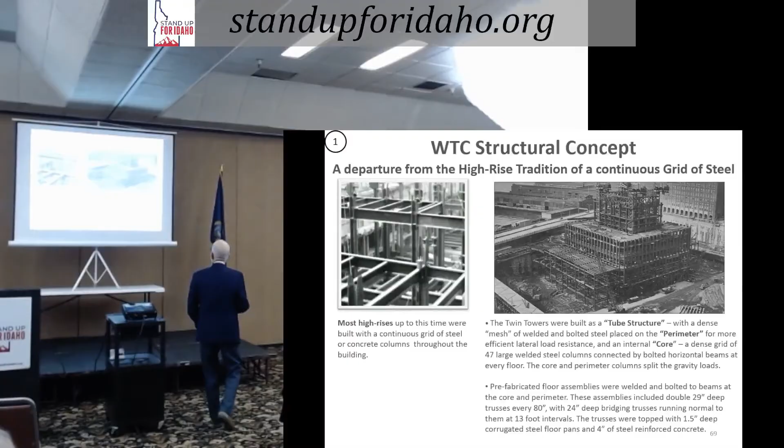So the first aspect is, what were the buildings like? This is a typical high-rise building of the old style, which is built with steel columns and a grid of steel girders and beams that run throughout the building. The towers were built with a relatively new concept, and that is around the exterior you had a dense group of columns that are box columns, and as you can see, there's a lot of columns around the perimeter,

and then they had a core column in the middle, and then they used very lightweight floor trusses to connect between the perimeter columns and the interior columns, and that gave them a lot of unobstructed floor space and made it a very desirable structure from the standpoint of the builder, because you're going to get a lot of rental space that you wouldn't get in a normal building that had columns that break up the space. And this is a very strong building, probably the strongest high-rise building in the world at the time that it was built.

These exterior columns and interior columns are massively stronger than they needed to be. They have a factor of safety. The perimeter columns are 5 times stronger than they needed to be, and the interior columns are 3 times stronger than they needed to be to carry the applied loads. And the applied loads, of course, were the weight of the building itself, and the contents of the building, the live load, the people and the furniture and everything. And then it's got to withstand loads applied from the side, which would include earthquake loads and wind loads primarily.

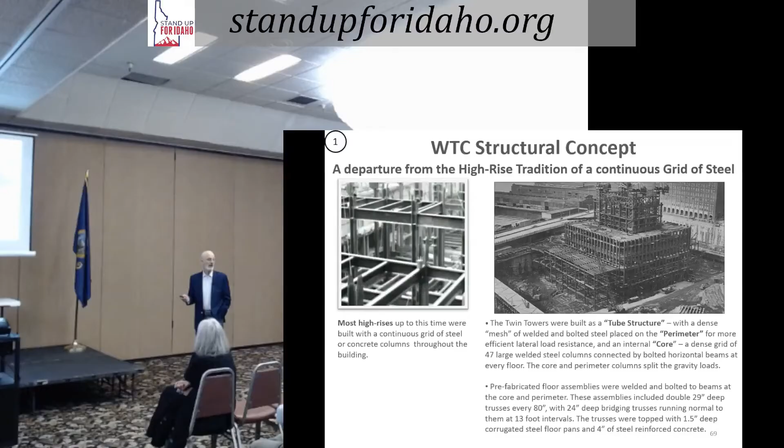Usually the wind load is the worst load on the building. This building was 1,300 and something feet tall, so you get some ferocious winds, and it had to withstand those. And so that's sort of the idea behind the design. It was a relatively new and revolutionary design at the time that it was constructed in the early 70s.

Here we see the floor plan, and the columns around the outside. This is 207 feet square, and the largest floor span is 60 feet, that's here, and the core of the columns is 135 feet by 87 feet. And so you get about 43,000 square feet of usable floor space per floor.

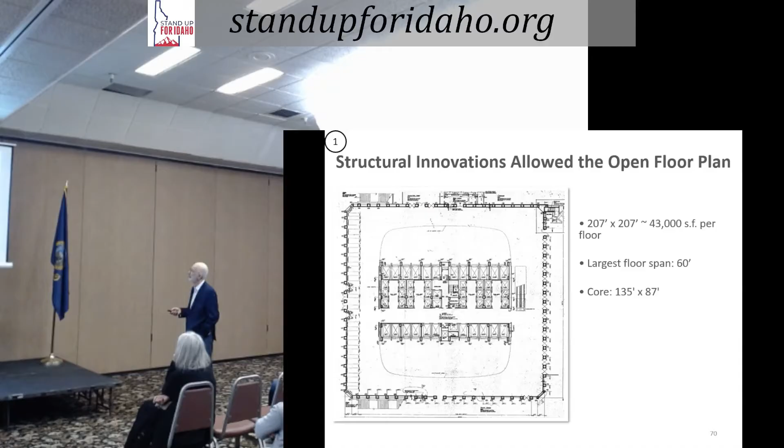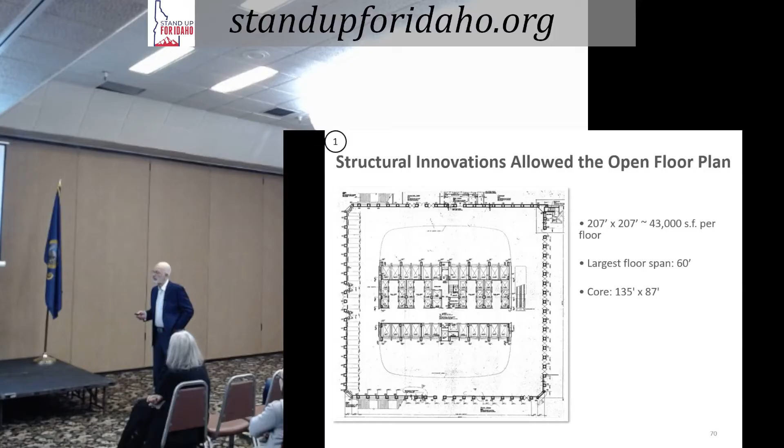So in the interior, you have the stairwells and the elevators. And these columns on the outside are only about 38 inches apart. So you don't have any big bay windows looking out over the view, and that was one of the criticisms of the architecture. Some people said, well, this isn't very friendly to the people that are working in it, because they don't get to look out over the city, because these windows in between these columns are high and narrow. So that's one of the things that you lose with this design.

They were solidly constructed. In the interior, you have 47 massive steel core columns, and on the exterior, you had 240 steel perimeter columns. And here you get a picture of it as it was coming up. These are the core columns here, big I-beams in the shape of a capital I with a big flange on the top and the bottom and an I section in the middle. And you can see the perimeter columns here. These are boxes. They're 14 inches square, and they get thicker as you go down because they have to carry more weight at the bottom of the building.

So the building looks like it, and it is uniform all the way up, but you have to imagine that structurally it's like a pyramid, because you have to carry all the weight above it at any particular section. So down here at the bottom, you're carrying the weight of the entire structure above it. So the thickness of the box beams on the perimeter gets thicker as you go down, and the size of the I-beams in the interior core columns get bigger as you go down.

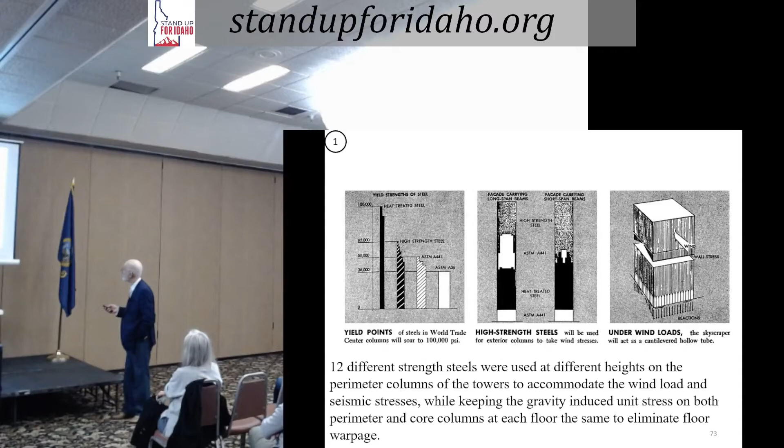So what happened on September the 11th? First of all, the North Tower was hit by an airplane at 8:46 a.m. It collapsed 102 minutes later. That was American Airlines Flight 11, a Boeing 767, and it was traveling at an estimated 473 miles per hour. Now those are the numbers that the National Institute of Standards and Technology used for their analysis.

We're not verifying them, and we're not saying that they're true or accurate, but we're going to try to replicate what they did using the same information, because that's the way engineering and science works. You have to see if you can replicate what somebody else did. So we're taking the NIST information. This is the NIST information. The South Tower was hit at 9:03, and it collapsed in 56 minutes. That was United Flight 175. It was the same type of aircraft, a Boeing 767. It was traveling at 566 miles per hour.

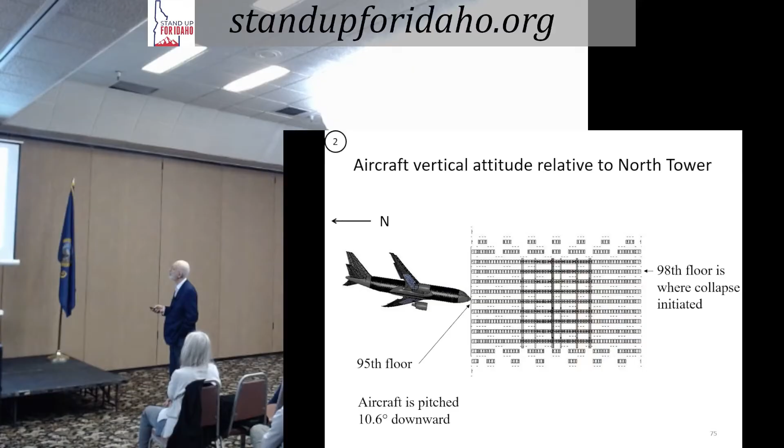You see at the 98th floor, the starboard or the right wing just barely impacted the 98th floor. The port wing just barely impacted down here at the 94th floor. The main impact was between those two floors.

Here's a discussion by a well-known structural engineer, Charlie Thornton, and he talks about what the significance of that impact was. The fact that they were designed to resist over 13,000 tons of wind pressure meant that they could not be knocked over. In a remarkably prescient interview given over 15 years ago, Charlie Thornton, now one of the investigators, considered the scenario. Well, 13,000 tons is a lot of force.

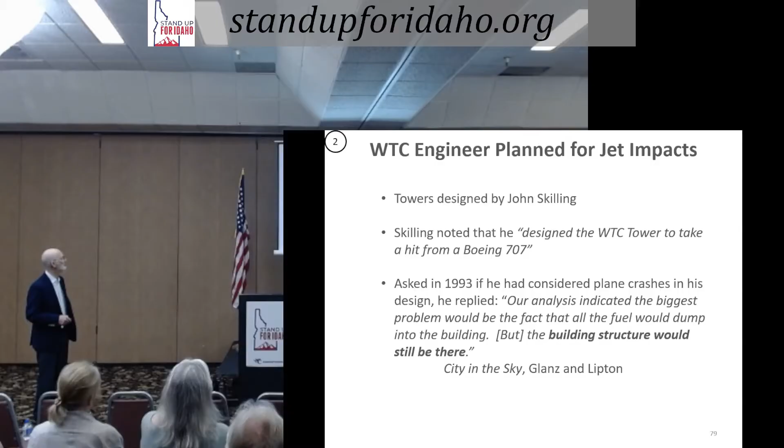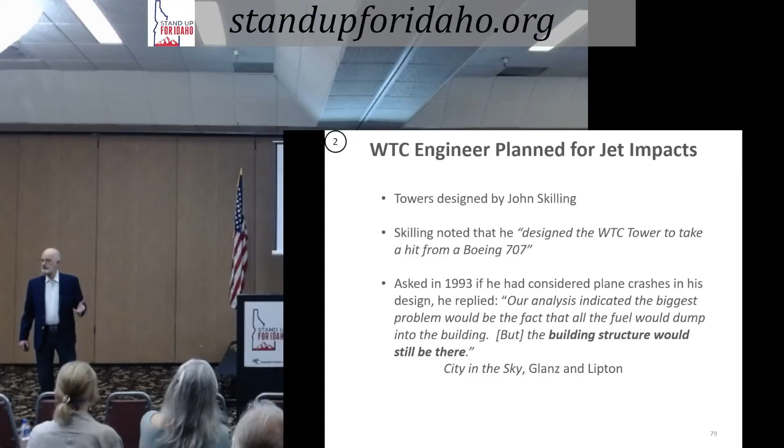And he said, well, the biggest problem would be that the jet fuel would dump into the building, but the building would still be there. In fact, at one point he said, you could take out all the columns on the perimeter on one side and half the columns on the adjacent side, and the building would still stand. So that's how strong this building was. It was tremendously strong.

Now, in the future, I'm going to be talking about 3 zones of the building. First of all, there's the impact zone. That's where the plane hit, the 4 or 5 floors that were impacted by the plane. There's the upper part of the building above the impact zone, and there's the lower part of the building below the impact zone. So those are the 3 zones, because we need to think about those zones, because that's how NIST explains and we understand how the building came down.

The plane impact weakened the columns. This is the NIST explanation. The plane impact took out some of the columns, and so it weakened the impact zone. Then the fires, which spread throughout that zone, further softened the steel and caused the steel to lose some of its strength, and that caused it to be unable to withstand the weight of the building above, and the building above fell down onto the lower part of the building and crushed it all the way down to the ground.

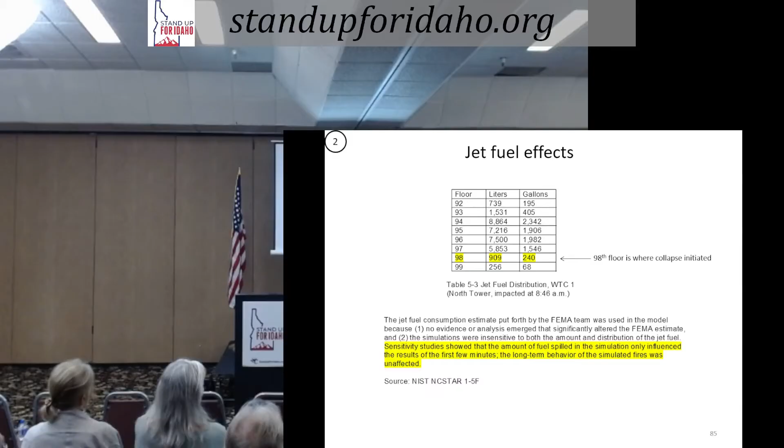So the fuel on the plane was effective at starting the fires, but most of it burned off within a few seconds. Most of the fuel was carried in the wings. The wings were shattered when they went through the columns. That aerosolized, mixed the fuel with air, and it ignited. And if you remember the videos, there were big explosions of yellow and orange flame outside the building. That's where most of the fuel burned off.

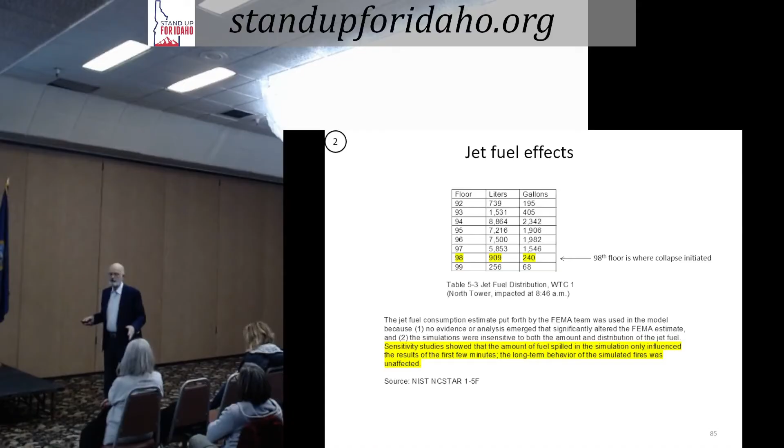The aircraft fuel had burned off within a few minutes. The only fires that remained were the fires that had been set in the office furnishings in the building that were flammable. So the aircraft fuel was only instrumental in starting the fires. The fires that burned after that first few minutes were all just combustibles from the offices.

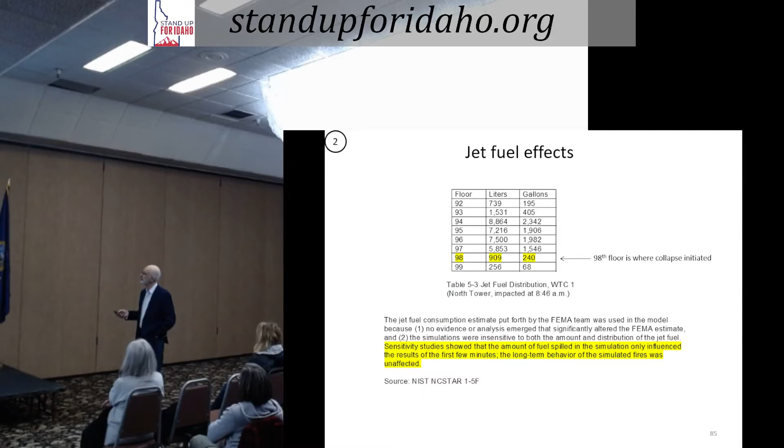So here's the reasons why the aircraft impact and the jet fuel would not have caused the collapse. The wings would have not made it to the central core. Most of the jet fuel was aerosolized on impact, most of it outside the building. The fuel which did enter the building burned up within a few minutes.

The redundant steel frame redistributes loads. Well, redundant just means there's a factor of safety there. It's stronger than it needs to be. And the factor of safety against vertical collapse was 5-to-1 for the perimeter columns, and 3-to-1 for the central core. That's far too high for the impact damage to approximately 20% of the columns to have caused collapse. If you built this thing much stronger than it needs to be, you can still lose a lot of your structure, and it's going to be able to withstand it.

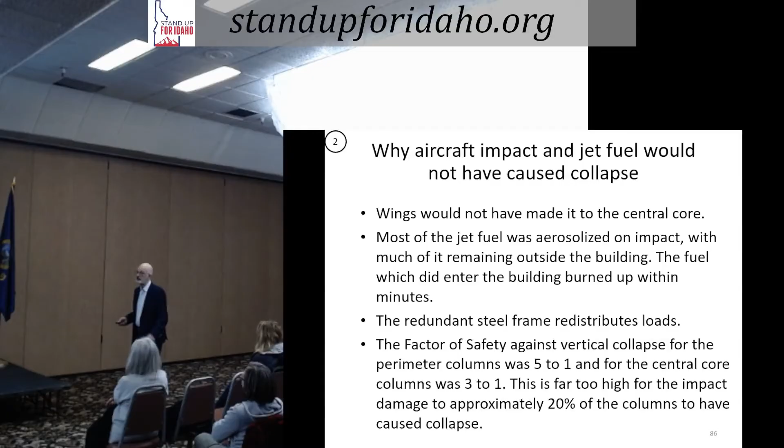So NIST had this theory, and the theory that they have is that the perimeter columns failed first, and that's what brought the building down. That's what initiated the collapse. So they said what happened was the fires heated up the floor trusses, and we'll look at the floor trusses in a minute here. These are light floor trusses with a pan on top and concrete poured on top of the pan. And they said that the fires weakened these trusses, and they deflected. And when they deflected, they pulled in the perimeter columns, and the perimeter columns failed successively around the building, and that's what brought the building down. So that's their theory of why the building failed.

In order to try to prove that theory, they made some half-size truss models, and they subjected them to heat. And here's their computer animation of their model. This is the floor truss, and this shows the heat that it was subjected to, and you can see the heat at the connections, that the core columns and the perimeter columns are very hot, and they said that this buckled, and that's what pulled in the perimeter columns. But if you look at the graph of their results, you see here a curious thing.

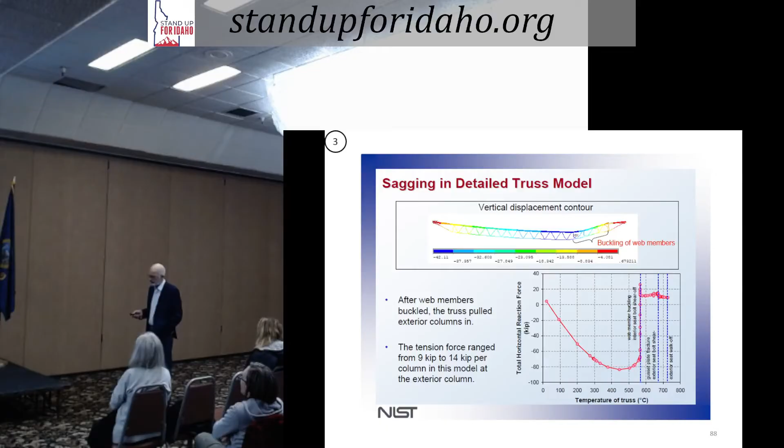This goes from 0 to 40,000 pounds. These are kips. Kips is 1,000 pounds. That's structural engineering talk. And so at 0 degrees, you got no deflection. As you run the temperature up this way to 800 degrees centigrade, this is what happens to the forces that are applied to the structure. And it shows that at this point here, you've got 80,000 pounds pushing outward on the building. And then all of a sudden, at a little under 600 degrees centigrade, the thing collapses and it goes into tension, and then it runs up to about 20,000 pounds in tension, and then the thing fails. So that's their analysis of what happened, based upon their testing of a half-size structure.

This is their finite element analysis. This is a computer model. This shows the perimeter columns. These are the floor trusses. They're 80 inches apart. These are the interior columns, and you see that the floor trusses run between the interior columns and the beams that connect them out to the perimeter columns. So their global model could not produce an inward force from sagging floor trusses which could pull the columns inward. In other words, no matter how they played with it, they couldn't get enough force by the floor trusses to pull these columns in.

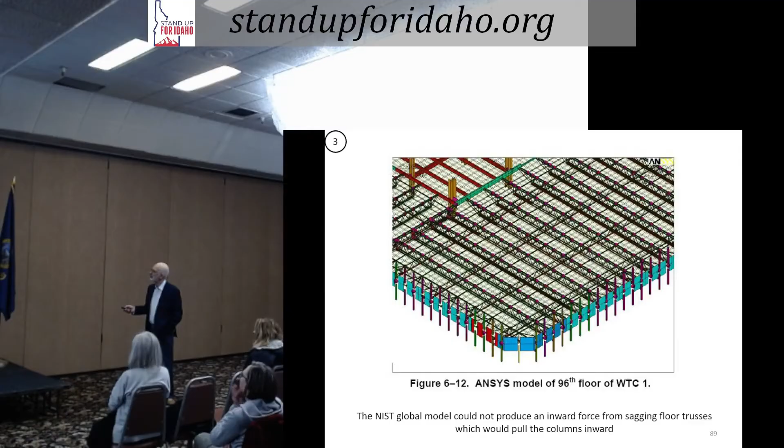So they got creative. In their model, they applied a 5,000 pound force to each connection to the floor truss at the perimeter columns, because they had to get the perimeter columns to bend inward. We'll see in the videos that that's what happened when the tower started to come down. We'll show that in a minute. But they couldn't get it to happen in their model, so they applied a 5,000 pound force to each one of those connections in the impact zone. Now that's not kosher. I mean, you have to have some reason. Where is its 5,000 pounds supposed to have come from at each connection?

What that means is that they took all these floors, the 99th through the 95th, they applied 5,000 pounds at each joint. That's a total of about 750,000 pounds that they applied to the face of that building with their computer model that wasn't there in reality. But they had to do it to make their model look like the reality. So this is a serious problem. I mean, I don't know how they justify this or how they can explain it, and we'll see later that they don't.

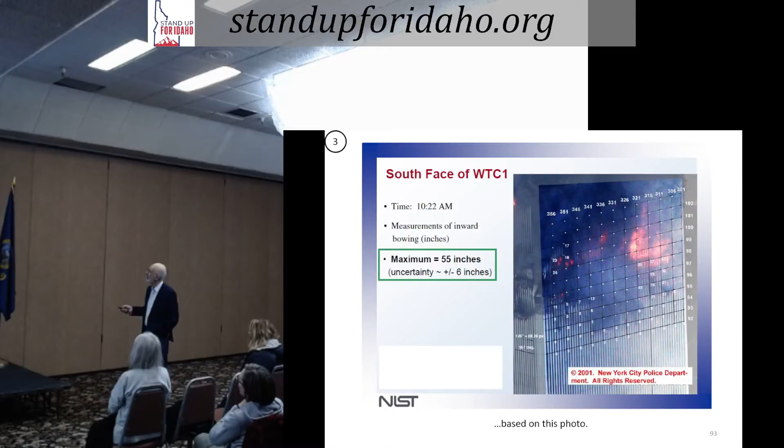So they had to do that because photographs of the wall showed that it bent inward before it collapsed. So that's why they needed to put in that 5,000 pounds on each connection. This is a photograph that shows the inward bending. It's not very clear, unfortunately, but they put a grid on this thing with a computer, and they can measure the distance from the grid into the face, and they had a maximum bowing in of like 55 inches. So they had to replicate that with their model.

So here's their explanation, and just bear with me for a minute. This is their explanation for how the buildings came down. They said, first of all, you had bowing of the columns. As more columns buckled, the entire width of the south wall buckled. Instability started at the center of the south wall and rapidly progressed horizontally toward the sides. Remember, the plane hit on the north side for the north tower. So it's not very believable that the collapse would be initiated on the opposite side, on the other side of the core columns. But this is their explanation.

As a result of the buckling, the south wall significantly unloaded, redistributed its load to the softened core through the hat truss. We'll talk about the hat truss in a minute. And to the east and west walls through the spandrels. The spandrels are the plates that are welded to the perimeter columns to hold them together.

2 minutes before the collapse, the north, east, and west walls at the 98th floor carried about 7%, 35%, and 30% more gravity loads than they did right after impact, and the south wall carried about 7%, and the core 20% less loads. So remember, the perimeter walls can carry 500%. Okay? This says that they're only carrying like 7%, 35%, 30%. Well, that's nothing on those columns. They can withstand 500% of the load. So this is not an explanation for why those columns would fail.

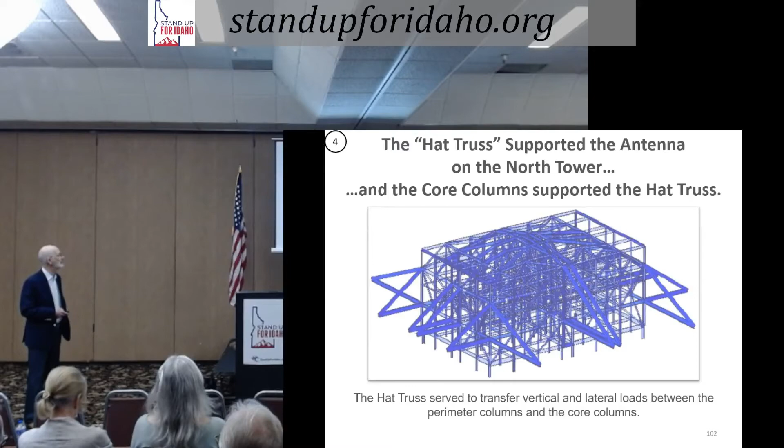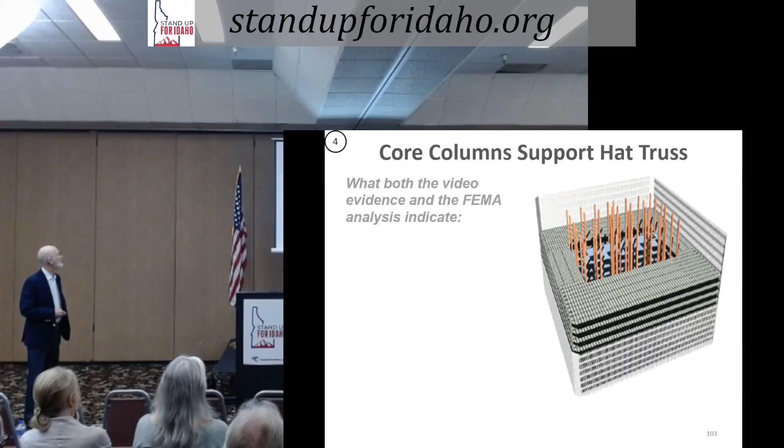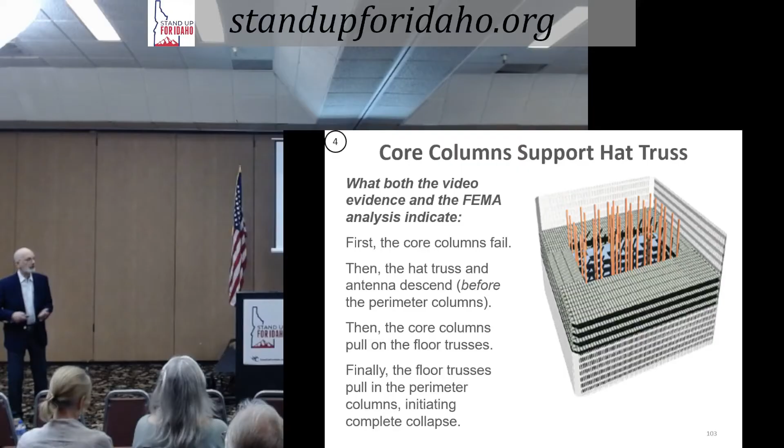Here's a schematic of it. You can see the perimeter columns out here, the core columns in the middle, and what the video evidence and the FEMA analysis say is that first the core columns fail, then the hat truss and the antenna descend before the perimeter columns, then the core columns pull on the floor trusses, and finally the floor trusses pull in the perimeter columns, and that's what begins the collapse. Instead of fires buckling the floor trusses, it's the core of the building failing first and pulling the perimeter columns in with the floor trusses.

It would look something like this. Oh, well, here's a picture. This video is going to show you the perimeter columns being pulled in right before the building comes down. This is the south tower. You can see it right here. So because this is the visual evidence, NIST had to have an explanation for why that happened. That's what's going on.

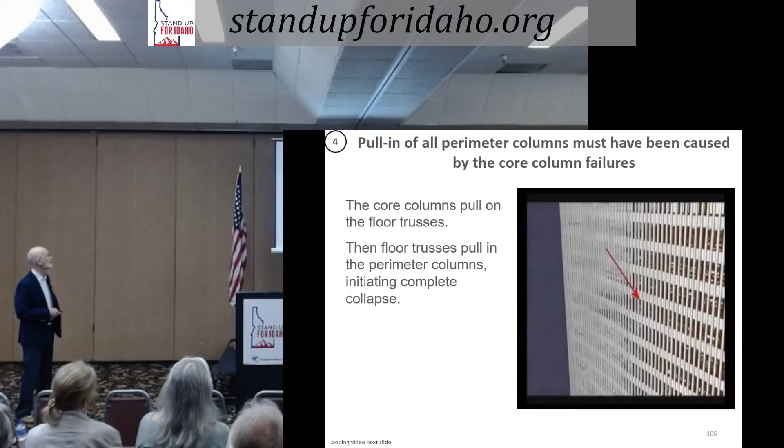So what we are saying, and what the FEMA report says, is that the core columns pulled on the floor trusses and the floor trusses pulled in the perimeter columns. That's what started the building to fail. And it looks like this. The core columns are failing. The floor trusses are tied to both the perimeter and the core. And when the core columns fail and move downward, they pull in on the perimeter columns, and that's why you see the perimeter columns being pulled in. It's a completely different analysis.

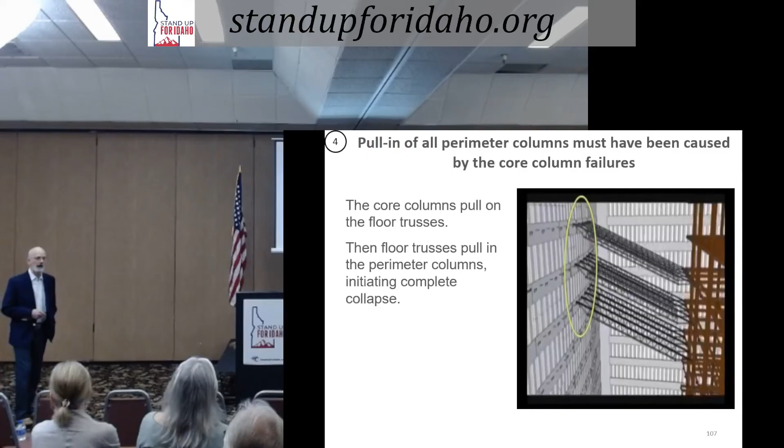And then the question is, well, what was the damage to the core columns that caused them to collapse first when there was very little damage to the core columns? The aircraft hardly reached the core columns. And this must have occurred somewhere down below because the core columns are moving downward into the area of the building that was not damaged by the aircraft. There was no damage down there. There was no fire. There was no impact. Why was this happening?

So there was a professor at Northwestern University by the name of Zdeněk Bažant. And 2 days after the event, on September the 13th, 2001, he submitted a paper to the Journal of Engineering Mechanics, which is an ASCE publication, and he had an explanation for why the towers came down.

Now, this is a pretty remarkable feat. 2 days afterwards, he's got an analysis that shows how the buildings collapsed. Pretty remarkable. He didn't have the structural drawings. He didn't know anything about the temperatures. He knew nothing about the damage to the columns, but he had an analysis that showed exactly why the buildings came down. So he's a pretty interesting guy, by the way.

He's not a structural engineer. His specialty is fracture analysis in ceramics. And he's a brilliant guy. He used to be the editor of the journal that he submitted the paper to, and he was the editor there for 8 years. He's been a professor at Northwestern University since the late 60s. He's 93 years old. He's still teaching and still working. And he's a brilliant guy. There's no question about it. He can write papers that will make your head swim.

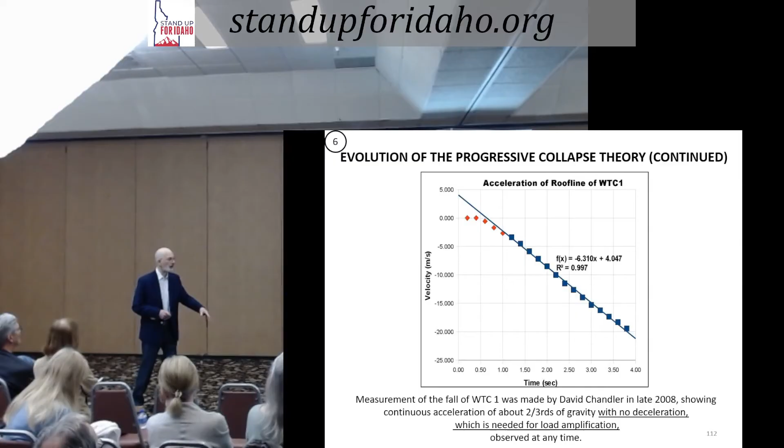Remember, if you play pool, right, the cue ball hits the object ball, and the cue ball stops and transfers its momentum to the other ball. There has to be a transfer of power there, right? It's got to happen. If the top of the building fell down and crushed the lower part of the building, there had to be a jolt. Bazant himself said that. But when you analyze the video, there's no jolt. There's no pause. There's no change in this.

So that became the next point of contention. There's no deceleration, and that's needed to apply the load to the bottom part of the building. So a couple of guys, Tony Szamboti is a mechanical engineer in New Jersey, and he's kind of a tough old New Jersey type of guy. And he said, you know, this is not working. And so he published this paper with his co-author, Graeme MacQueen, and it's called The Missing Jolt, a simple refutation of the NIST-Bazant collapse hypothesis. And they wouldn't publish it, so he put it on this Journal of 9/11 Studies, which is an online blog.

So then David Chandler, he came out with his analysis and said there's no jolt. When you look at the videos, it doesn't ever pause. And so Bazant had to come back again and defend his theory again. And so in January of 2011, he published another paper, Why the Observed Motion History of the World Trade Center is Smooth. In other words, why is there no jolt? I said there was a jolt, but it doesn't seem to look like there is, but now I'm going to explain that.

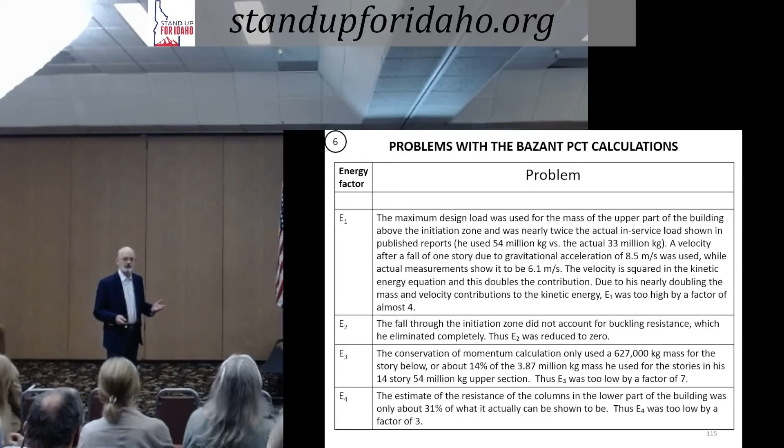Then the last thing he did was he estimated the resistance of the columns. It was only about 31% of what can actually be shown to be, so that was too low by a factor of 3. So he underestimated the resistance at the bottom, and he overestimated the force at the top. By playing with those numbers, he could make it seem as if his equation worked. But in fact, when you put in the right numbers, this is what his equation looks like. E1 is less than E2 plus E3 plus E4, and the building won't collapse.

So, you can make your model work whatever way you want, depending upon what input values you put. They have to be realistic, though. And he was cherry-picking numbers and falsifying their magnitude to make it look as if his equation would work. And that's what the Szamboti paper is pointing out, and that's why they won't publish his paper.

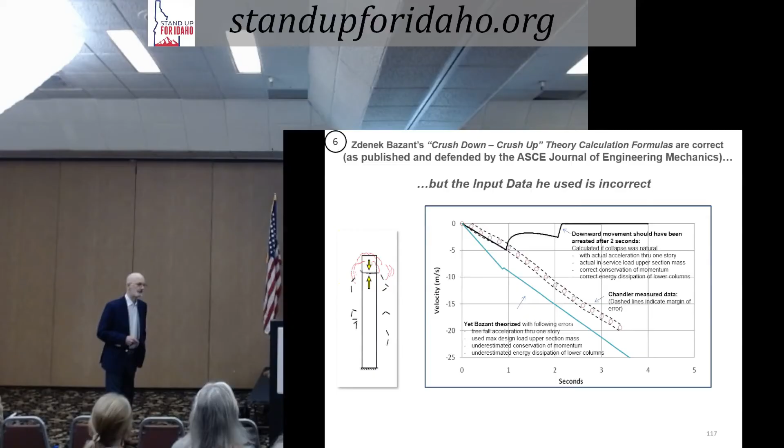Here's a measurement of what the high school teacher showed in terms of deceleration. This is what Bazant claimed with his theory. See, he shows a little bitty bump right here. And this is what it would look like if you use the correct values, which shows that after about 2 seconds, the velocity of the upper part of the building would stop, and it would be 0. So in other words, no collapse mechanism.

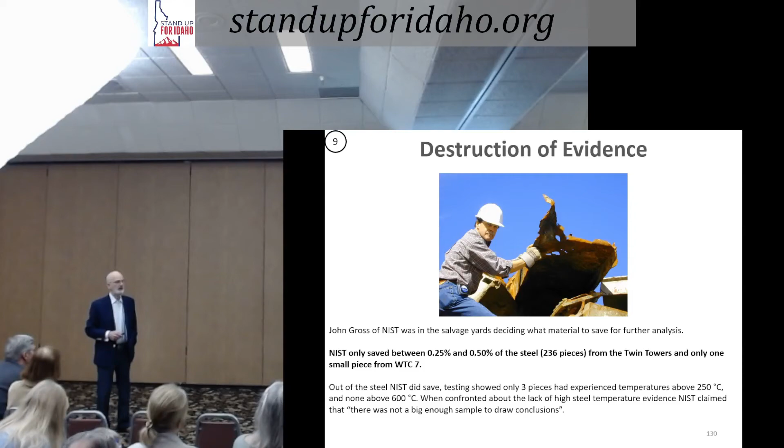And yet they claimed that there was no evidence of explosives, no evidence of incendiaries. They never checked for any incendiaries or explosives, and they said that there was no reason to because they didn't believe that anybody had heard explosions or anything that would indicate that there had been an attack on the building using explosives or incendiaries. So that is their excuse.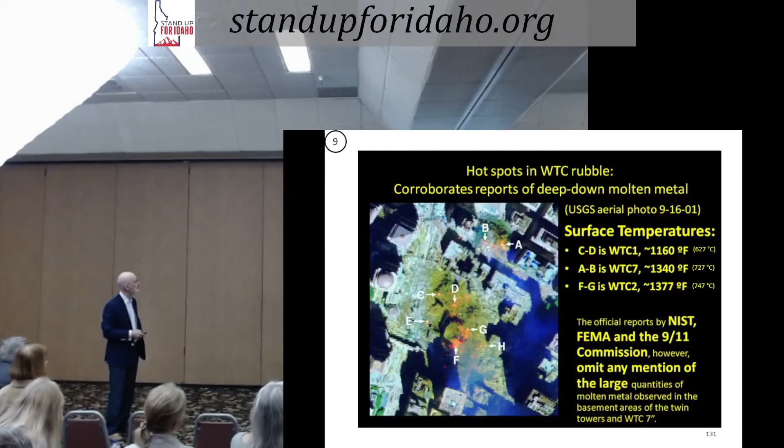And there were also quantities of molten metal found in the debris for months afterwards, and that was never explained. There was no way you could explain that with office fires and diesel fuel. They just ignored it. So anyway, these are all the problems that we've just got through enumerating.

I'm not going to drive you crazy going through them again, but we've got a list here of 5, 6, 7 things that were wrong with their theory. And we've just gone through them one by one. So I don't want to put you to sleep with going through them again.

If we put them into categories, we find 7 different categories. This is both the towers and Building 7. The 3rd, 4th, and 6th only apply to Building 7. But as far as the towers go, they have a defective collapse initiation theory. They make unjustified assumptions and errors in their reports.

They have errors in the calculations of the ASCE theories, and they have refusal to respond to peer criticism. We've asked them to respond. They say, if we tell you what we did, it's going to jeopardize public safety.

So we end this by asking, you know, what would you like to do? What could you do if you're an architect or an engineer? We have a petition on our website. You can sign it. Calls for a new investigation. You can disseminate this information to engineering colleagues. This is what we're doing.